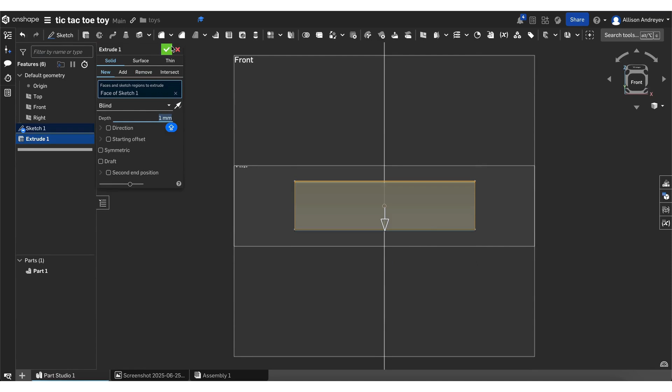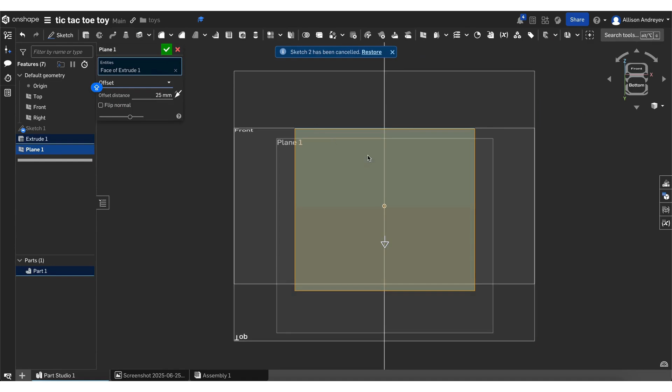Next, there's a little bit of a sketch on there, and the box is a little bit wider. In order to do that, we actually have to make a plane that is offset off of this new surface. I want it to be roughly 25 millimeters offset. Now let's make a sketch on this plane.

I want it to be a center point rectangle. This is pretty good, and then I want it to be definitely not 10, probably 100. I want both sides to be equal to each other, and the center should be coincident with the current center.

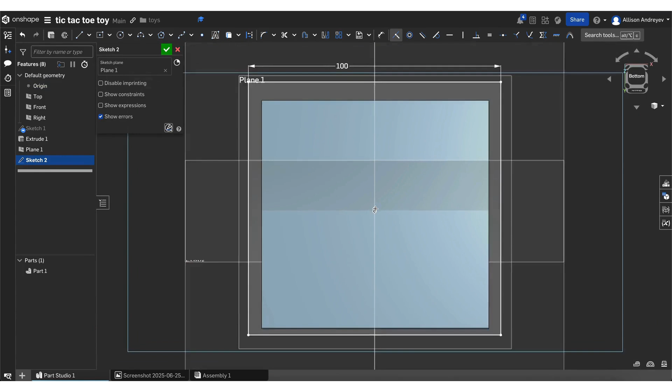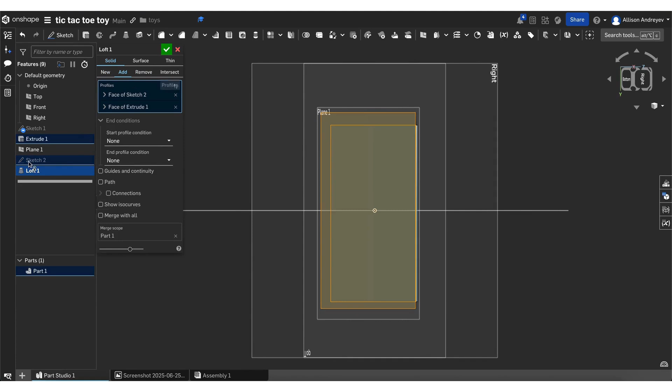That looks good. Next I'm going to create a loft from this surface. It's going to be quite hard to do this without... there we go. And I'm going to create a loft.

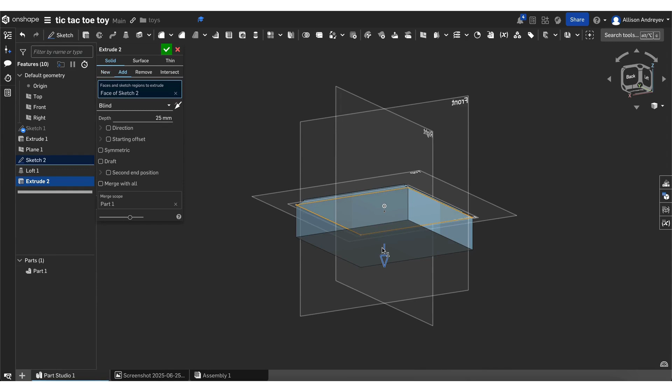Now let's see what they have here. Now we just extrude that surface downwards a little bit, but other than that, it looks good. For our base, think around 25 millimeters.

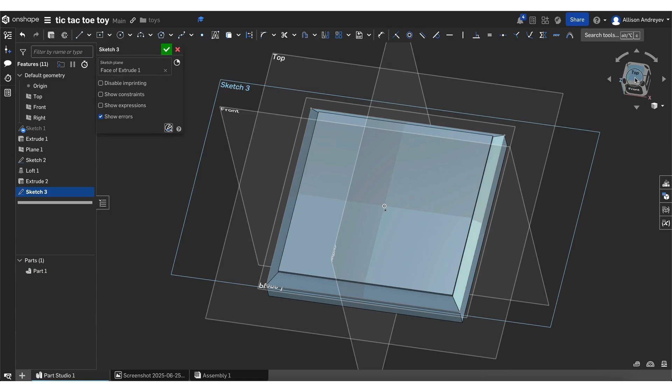Now that we have the base done, I'm going to hide this part as I make the cylinders on the base first. The base itself is going to have a 3x3 group of circles on it.

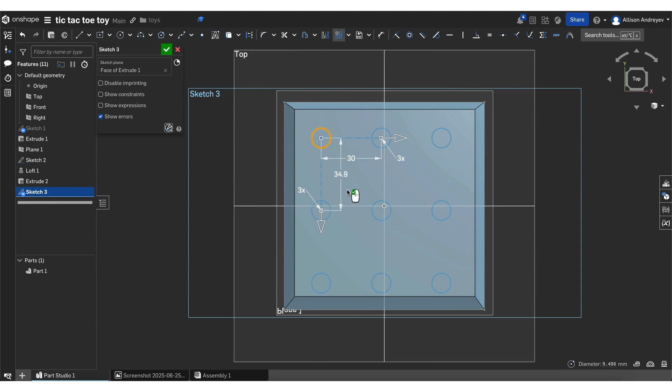I'm going to create a linear pattern, 3 that way, 3 that way, going like so. I definitely want them each to be a lot more apart - 30, and for some reason maybe I have to put -30. I don't know. I'm just going to tap yes to that, and then I want to extrude each of these.

We definitely want them to be taller than that, probably 40. That looks pretty good.

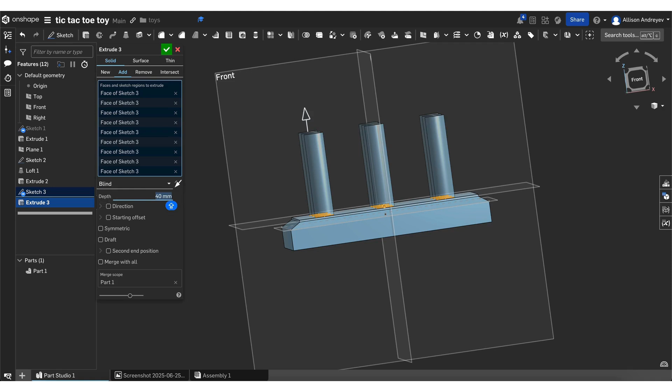Now all that's left is to make the individual pieces. I'm just going to make one of each X and O, and then we're going to be able to, in the assembly, duplicate and stack them as needed.

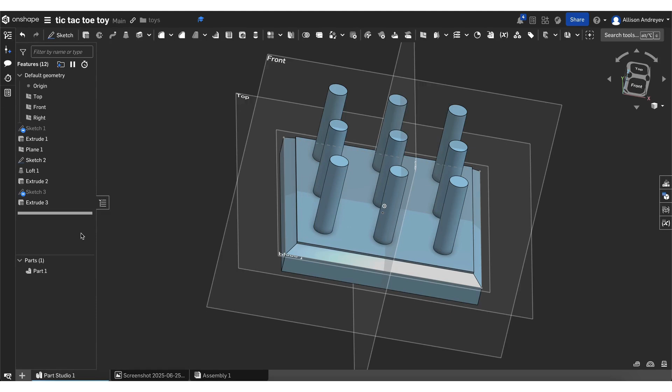I'm now going to hide this part and make a sketch. The first thing I'm making here is the X looking thing. It kind of looks like a flower a little bit. I think I abused these a little bit before, but I like the splines a lot. I don't know if it's a good fit for this project though.

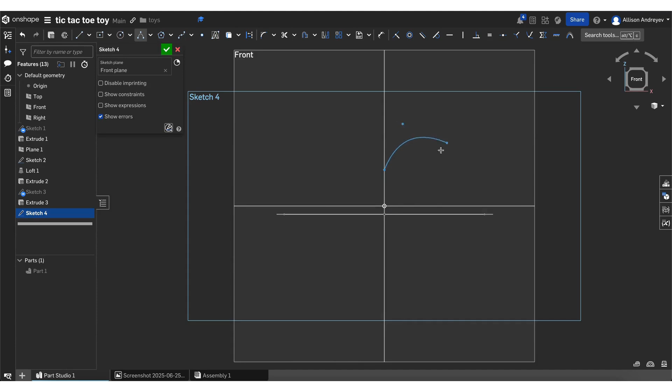Yeah, I don't think a spline is the way to go. I definitely need to do an arc of some sorts. I'm thinking I like the conic idea. So we have essentially like that, and then we have that like so.

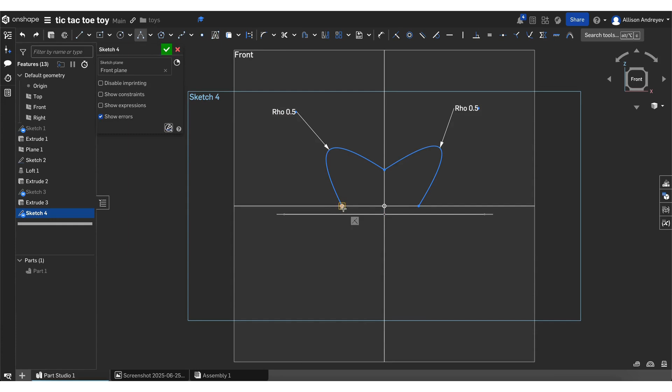And I am aware of Onshape's symmetry feature. That was not the right spot. I needed to be like here.

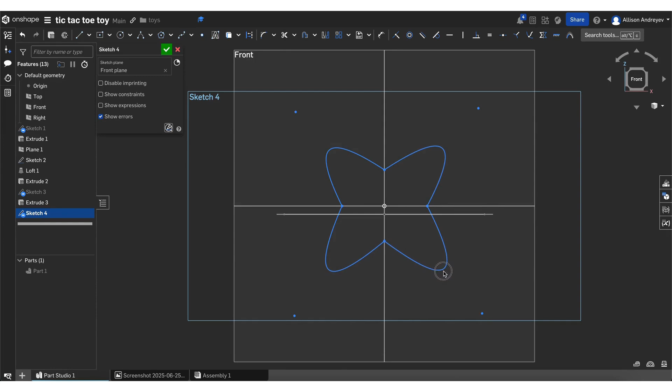That looks pretty good. I like how that turned out. So I'm just going to extrude it.

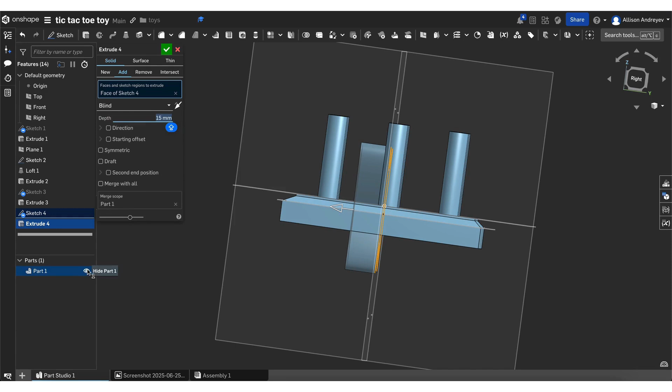And I'm gonna do new. Okay, next I need to create a sketch essentially.

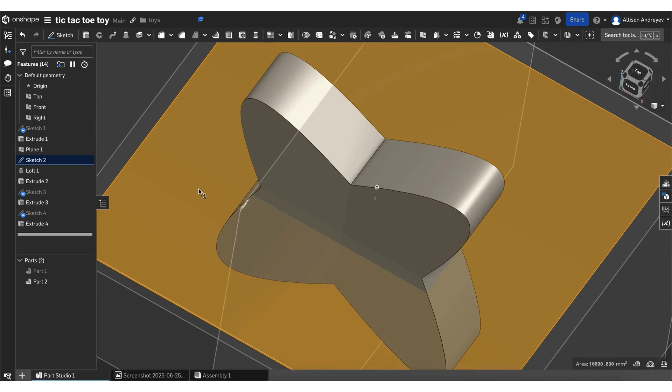So I need to create a plane offset from this. Create an offset plane. Make it higher.

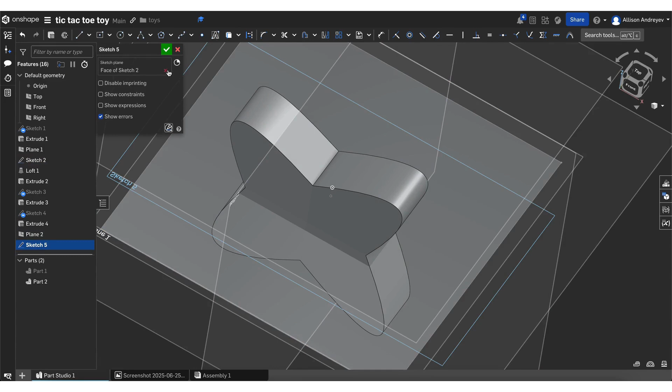Okay, now let's create a sketch on the new plane we just made. So now we need to make a little circle that's going to be our hole. And I want this hole to be coincident with this bottom line.

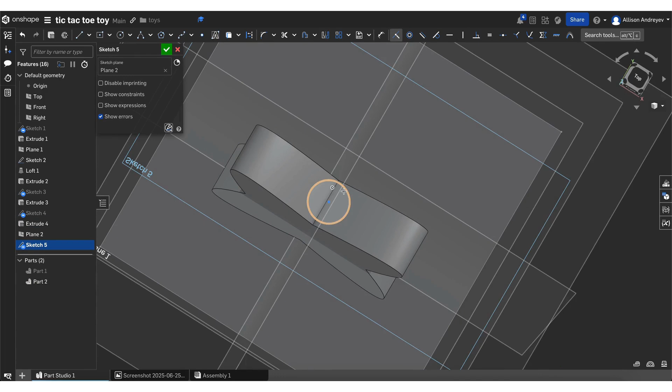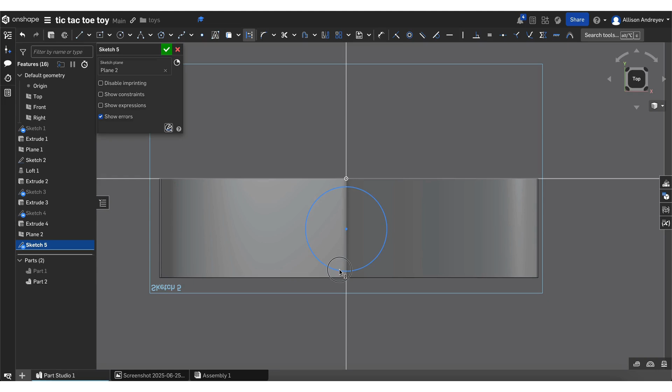Okay, and that looks pretty good. Let me see if I can drag. I should be able to make the circle larger and drag it down a little bit. Like so, that looks pretty good.

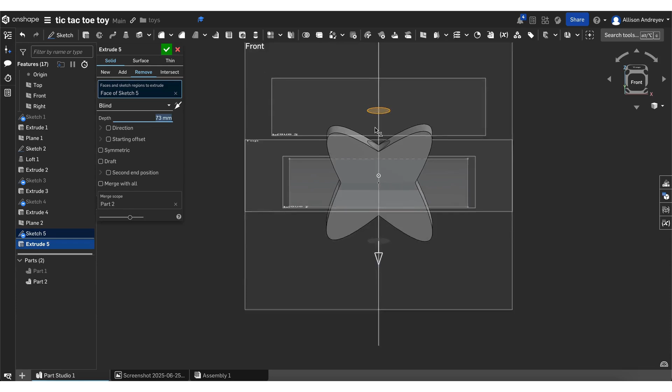Next, I'm going to extrude this sketch, except let me see if it lets me remove. Except it would go that way. Okay, cool, that works as expected.

Okay, so now we have a hole in our little X. So what's left is to make our O.

There's so many different planes that I want to get out of the way. Okay, so next we need to make our O. So let's make a sketch here on front.

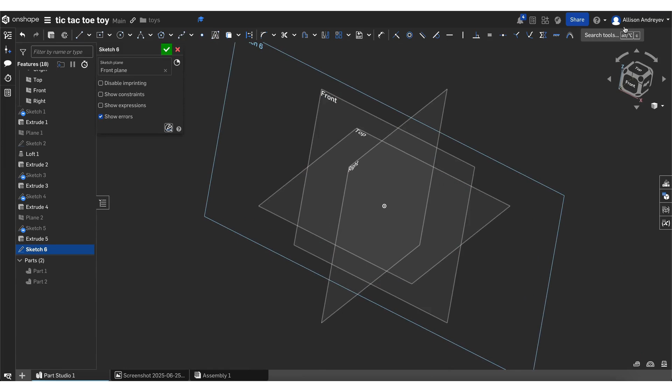My fault for misclicking there. Okay, so this one should look somewhat like this. We're gonna have a portion that's a straight line, and then we're gonna have a line going down the middle

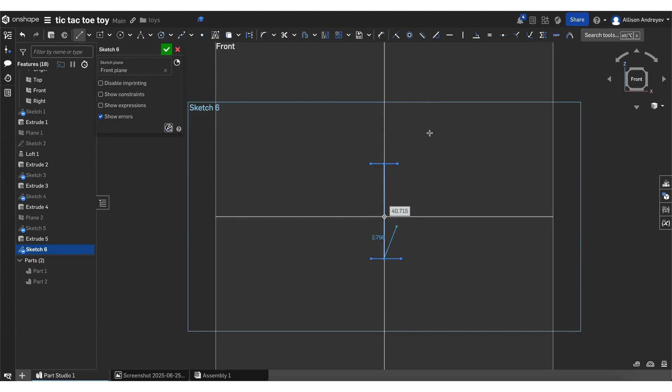here, and then I'm gonna have an arc, kind of like so. This looks pretty good for the shape of the cone.

The only problem I have with it right now, though, is that I want to make sure that the size of this is okay. So this looks a little too tall.

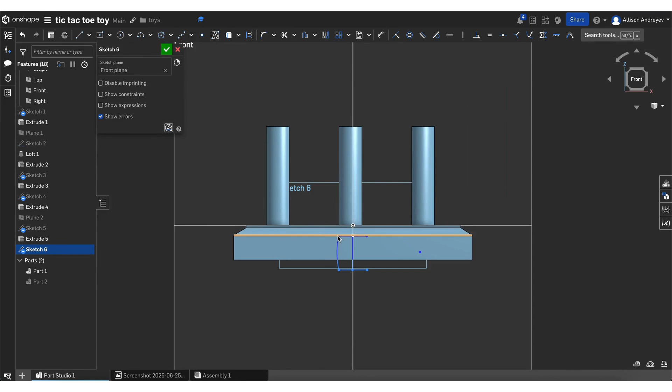And we need the arc to be more curvy. That looks pretty good, I would say.

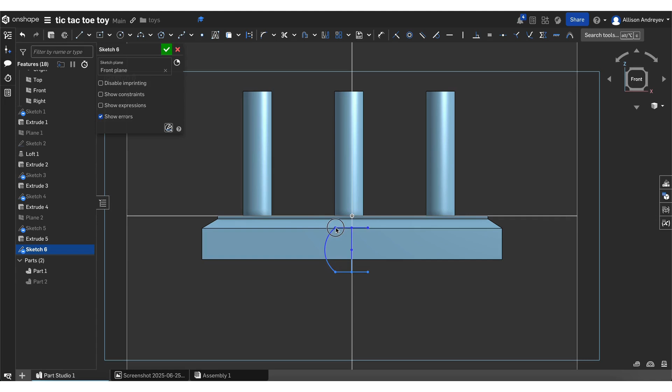But now I feel like this line needs to be larger. Like so.

Okay, so now we're just gonna do a simple revolve this face, and we're gonna do it around this. Cool, so we made our new piece, so now I'm just gonna create another sketch, do it on here.

It's pretty good. Remove. And that looks good. So next, all that's left is to visualize this in the assembly.

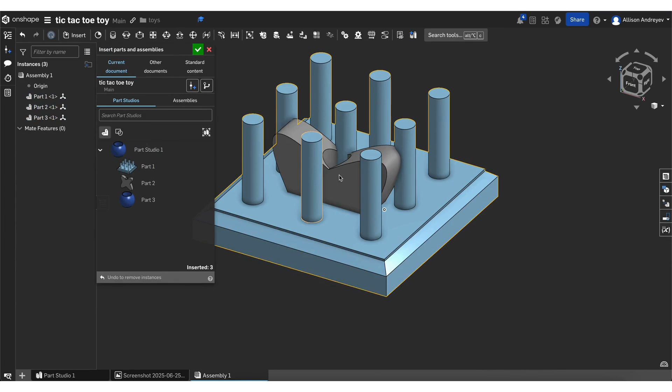So I'm gonna insert the part studio. I ended up making the X. This is way too big. Where is part 3?

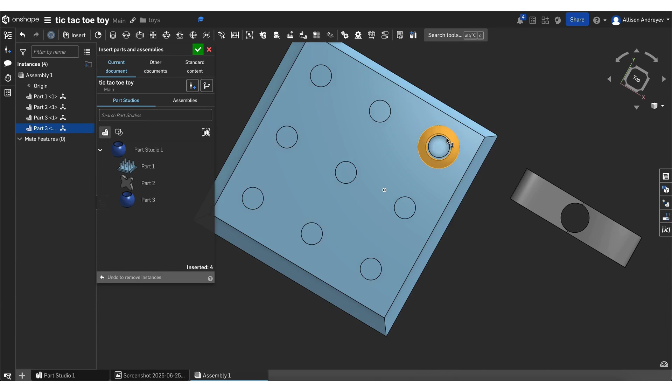Okay, so let me visualize how part 3 fits. Okay, so part 3 does actually fit on as expected. So let me go ahead and change Part 2.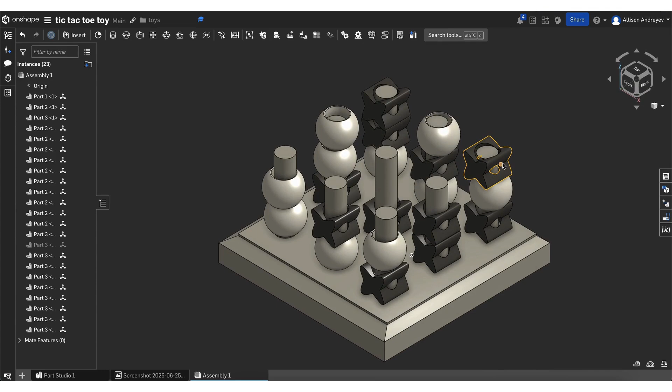So now I have added all the parts and I have arranged them to look like a game of tic-tac-toe. So it looks like the project is done. I also fooled around with the color of the pieces. I made them all beige so they could have that wooden feel.

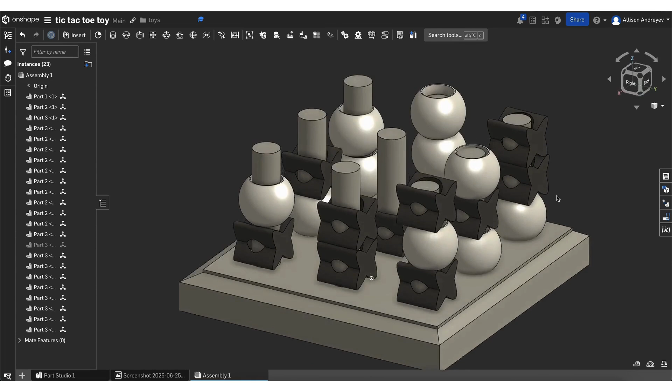So as a perfectionist, this is a little bit off. Before I continue presenting this, okay, cool. So yeah, I created this little setup, and you can just do this by copy and pasting the pieces and dragging them around. So that kind of concludes it for this tic-tac-toe game.